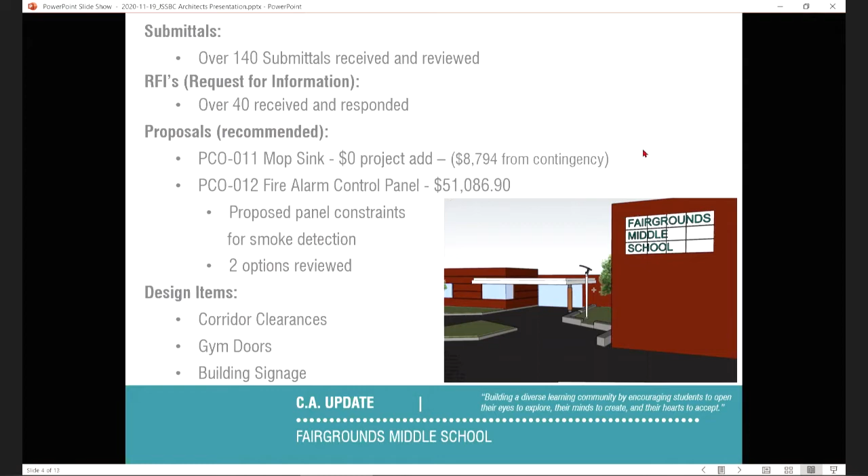All right, over at Pennichuck, that's the next project in queue to be handed out for construction documents.

More recently, since our last meeting, we had a second planning board meeting. As we spoke about last time, the first planning board meeting had some items that needed to be addressed before they would warrant approval on the site plan. So we had meetings with traffic engineers and also city entities like the city engineer and others, and spoke about the items that were in question. I'll show you those on the next slide, some of the items that we needed to address. But we did receive planning board approval for the site and are working to finalize those documents now that we have the approval. I'll show you that plan in a moment so you can get a handle on where that ended up.

In those meetings, we also met with the principal and vice principal. We followed up with them - this is probably the sixth or seventh time. We also had a meeting with them yesterday via a phone call that I had with the principal on some additional items that they're interested in, and we're looking at those items right now to see how they fit into the documents, budgets, and design scopes.

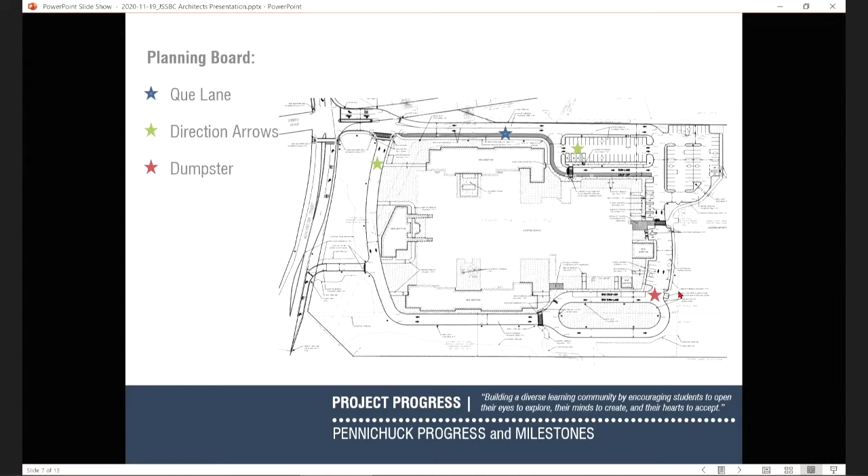The other bigger items they wanted to talk about at this most recent planning board were the traffic patterns at the intersection here. Vanasse and Associates, their traffic engineer, was brought on board. They were the ones that did the traffic study initially for the project, and they came in and helped with that presentation and discussion.

So that is what you're seeing here, kind of the revised version. We've all seen this a little bit to some level, but this is a little bit revised.

A couple items that are revised: there is now an on-site signal that will be timed and triggered not only by bus traffic leaving, but also coordinated with this signal so that when buses are pulling off and getting ready to leave, the parents dropping off won't block them in so the buses can't get out. The buses will trigger the signal, and when this one turns green, it'll allow the buses to leave first.

They're still doing final engineering, so how that works exactly is in their court. But because it may time out so that if traffic starts to back up, there'll be a loop that stops the buses for a moment and allows the normal traffic pattern to happen. Anyway, it's an on-site signal that's an addition to what we may have seen in the past, and this signal was recommended by city entities as well as the engineer.

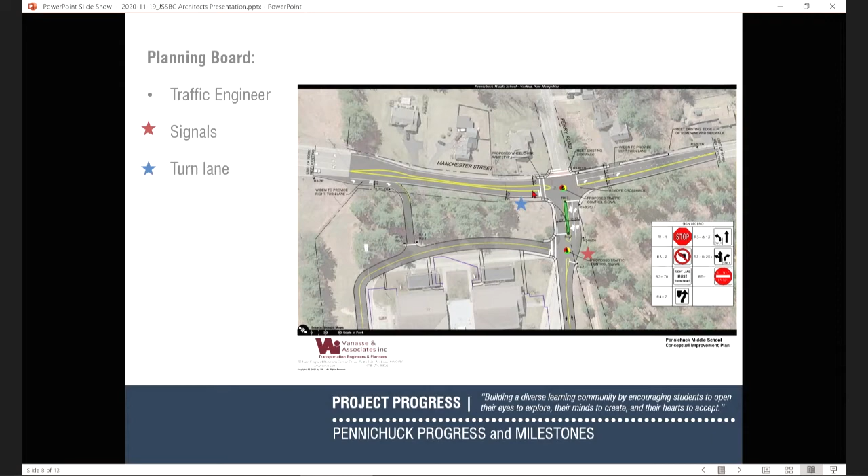All right, the new middle school. I think the big milestone right now is we have finished our design development submission, and we have issued that to Harvey for their estimate on the project at the design development stage. We actually issued that on October 30th, and they've been issuing RFIs and questions based on those drawings, because they're not final documents, so some things might not be totally clear in there yet.

And so we responded. Unless any came in today, I've caught up on all those. They are looking to hopefully have pricing come the first of the month, I believe is what they're shooting for. We're also getting ready for planning board submission over there in a meeting coming up. In the past I might have reported that being in the December timeframe, but it might actually be closer to January at this point, with just some final details being finalized.

So we're working on plans over there to finalize those.

All right, the schedule. Again, by that red line, you can kind of see approximately where we are.

The new Nashua Middle School is in the construction document phase. It's a little bit slow during this time period because we're waiting to make sure the estimates fall in line, and we're not going too far into the construction documents that we'd have to pull back work if we found something out of sorts. But those are being progressed on.

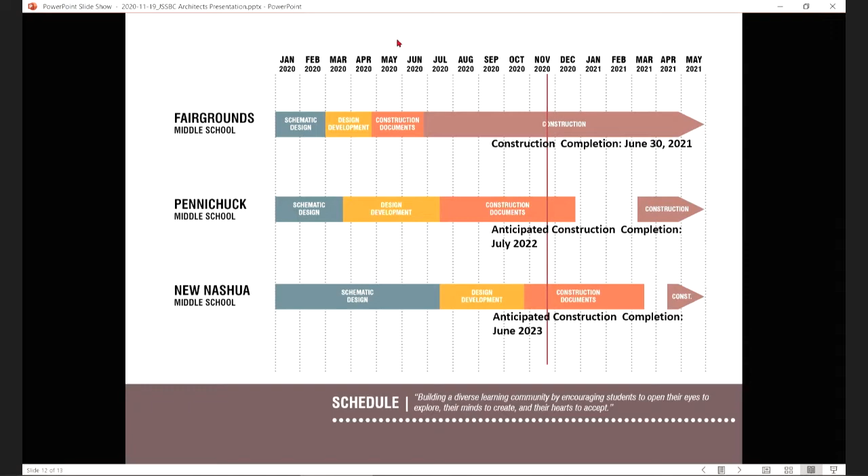All right, that's it.

Okay, thank you Jamie. Now we'll have the construction manager's report from Harvey.

You have a question, Alderman Klee? Yes I do. Why did we move the crosswalk from the location to where it is to the opposite side? Most of the kids are coming from the north, which means now they have to cross two streets. Well, now they have the light to cross two streets, and the professional design engineers put it there. Okay, so when we get to review the actual design of the intersection, you can ask that question. Okay, I was just curious. I didn't know if I missed something along the way, or that's fine. That's fine, thank you.

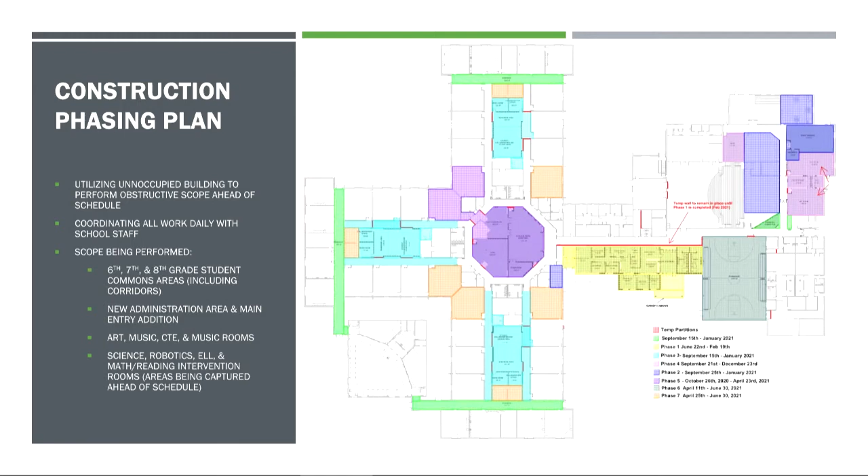And now the yellow area right here, this is the new addition and the admin area. This is the new front entry of the school. This is where I think you'll really see how the school looks as you drive up, and you'll start to see some of that take shape in the following slides.

As I mentioned earlier, this is the new front of the building. The front area here, the principal's office and these three offices, is part of the new addition that you'll see in the following photos. I'll have more photos next month of the interior portion of this.

Right now it's mainly dirt, and we're still performing some of the under-slab scope of work. We anticipate placing the slab on grade here and starting to construct walls within the next three weeks or so.

Just on the picture on the right here, this is to give you an idea of what students will see when they come back to school. I believe we are going to install a portion of the finished flooring to an extent, but this is a hard partition. So this wall runs along, if you can see my cursor, the new gang bathroom, all the way down the hallway across from where the current principal's office is.

This is just to delineate safely our construction work area from students and staff. When this admin area is complete, we'll be taking down the wall and everybody can see the new space.

So just a quick update here. All the demolition and abatement has been completed. The under slab work is 95% complete. We do have some foundation work to be completed, scheduled for tomorrow. Once those concrete footings are complete, we'll begin the masonry construction to construct the new walls at the interior, and then we'll place the concrete slab on grade so we can begin the wall construction inside. So this whole area is really going to start to take shape over the next month or so.

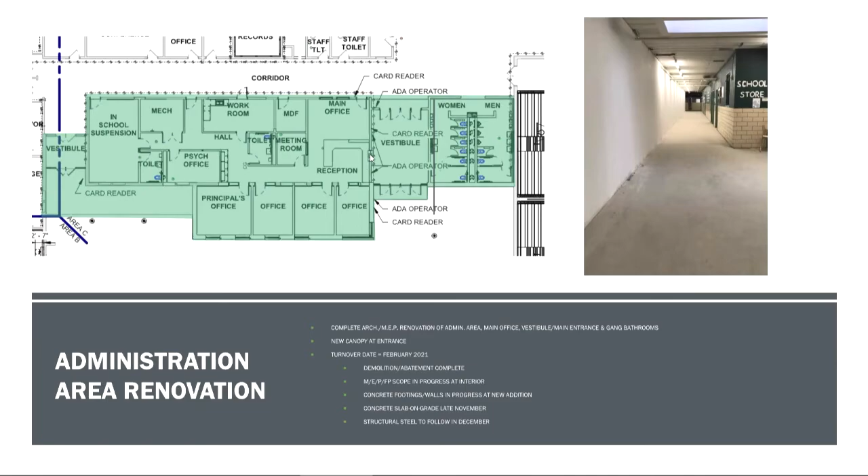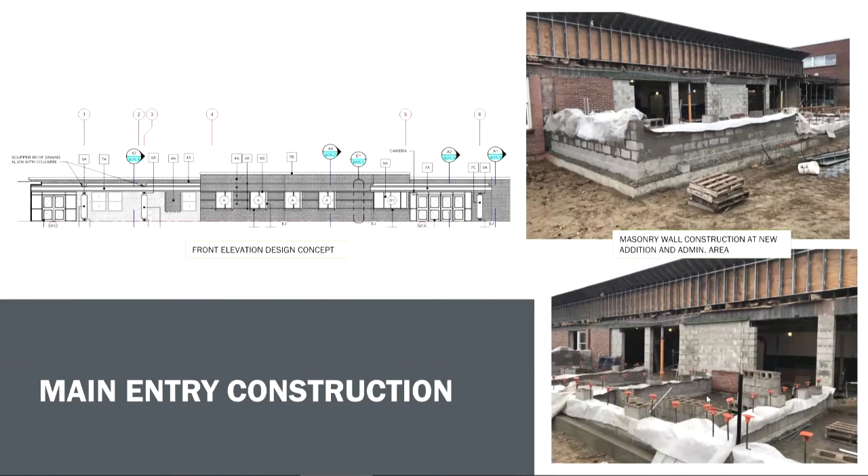And here's just a couple of progress photos taken from, I believe, 2 weeks ago of the masonry construction. So here's Principal Coffee's new office on the left here, and then on the bottom right is some of the smaller offices in the admin office.

So again, another area that will be turned over in January are the student commons areas. These are probably the spaces that will garner the most interest.

Right here, in the upper left-hand corner, you can see this is the 7th grade wing. You can see that the colors have been dressed up. We do have new soffits here. All that's missing right now are the lights and some casework. These areas are going to basically be used for collaborative working areas. There's going to be marker boards, and you can see in the lower left there'll be TVs on the wall. So this is going to be a nice space where if teachers want to change things up and take their classes outbound, this is going to be a good area for students to work together in.

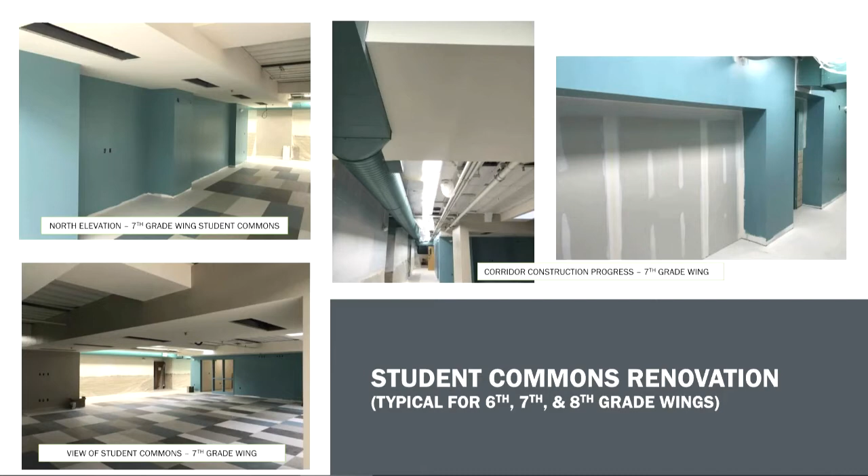Again, so all the lockers used to be in the center of the room. Now they'll be located in the corridors here. The upper right-hand corner is a good example of a locker bay where the lockers will be installed. We do expect those to hit the job site early January and be installed for when the students arrive. And they're lockers that can take backpacks. Correct, there are double tier lockers.

This is the view of one of the student commons areas that is a little less further along. At the time of these photos, the paint had not begun. The paint began today in the 6th grade wing. So again, this is just another view of things to come. We do have some nice collaboration and workrooms in each student commons area, which has the same layout with a special education room at the end as well.

This is the center octagon area, as we like to call it. This is one of the areas where we've been able to take over earlier and perform a lot of the messy and noisy work. This is again the math intervention. There's a mechanical room, a storage room. This is where all the robotics and drafting is. There's a lot of work that needs to take place in this area.

There are combined rooms here. I believe the science rooms, the mechanical room, and the math intervention will be turned over in April 2021, and the remainder of this space will be turned over in June 2021. So we're trying to get in here and take care of a lot of the messy and noisy work before any students return to the building.

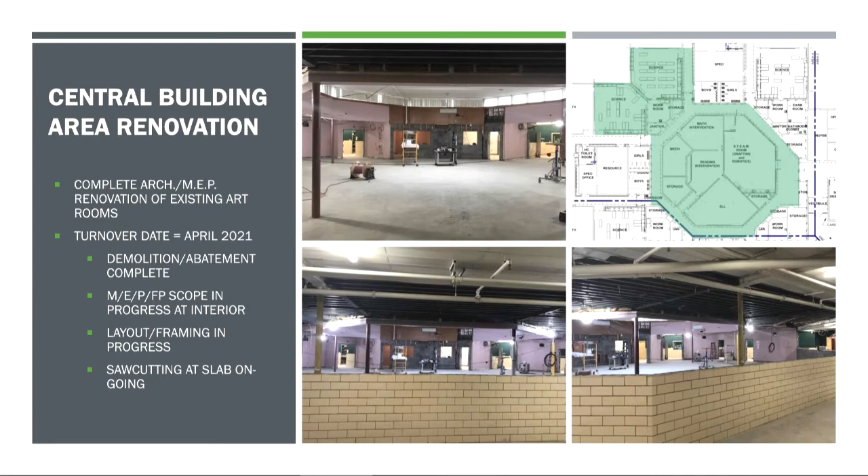Okay, does anybody have any questions? Anything that I reviewed? Any area? Questions from anyone? No? Okay. Yeah.

So you want to present the change order? Ken? You're on mute.

As Jamie reviewed this change order earlier, this is a potential change order. I know that we throw out a lot of acronyms. This is called a PCO, and this is PCO number 12. This is a potential change order, and it has not been approved until I present it to this group, and it is approved by this group.

Jamie went into this a little bit before in detail. This is for the upgrade to the fire alarm control panel. This gives us dual purpose monitoring for smoke and carbon monoxide. That is actually a requirement by the Nashua Fire Department. The system that was purchased with the job only carries smoke detection.